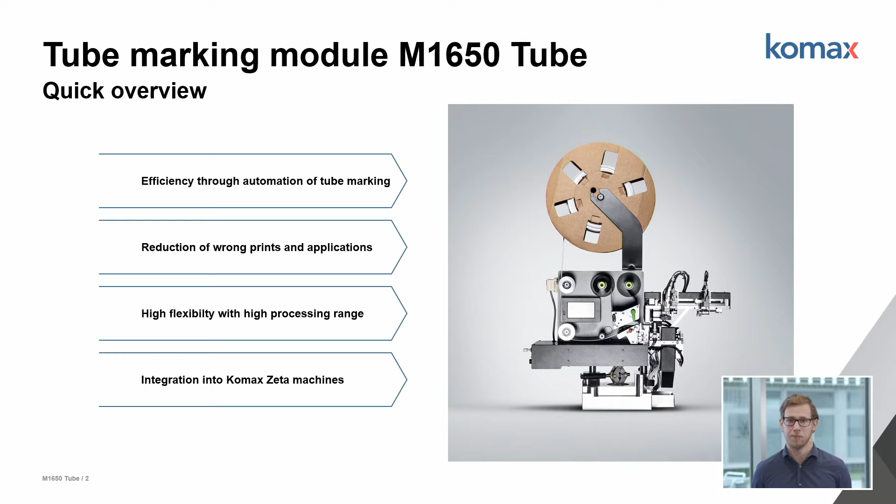I will get into the general topic of printed tube application up next. Along with efficiency, we also see the importance of error prevention, which can be increased with automation in general and also with this new module. Finally, it is important that we keep a good amount of flexibility nonetheless for different applications with the same module, despite the high degree of automation we see.

During the webinar, we'll also gain some insights into how the module performs in a production environment. Therefore, we visited our customer BBC Bircher Automation, where the module is already being used.

So let me first introduce you to the general topic of wire marking with printed tubes. What is tube marking, and where is this type of marking used as an alternative to other proven marking systems like inkjet marking or laser marking?

This marking system is a proven standard in control cabinet construction, as well as in the railway industry and other industries. In addition to printed tubes, there are also similar marking systems being used, like special wire clips or printed labels which are wrapped around the wire. But these are not in focus in today's webinar.

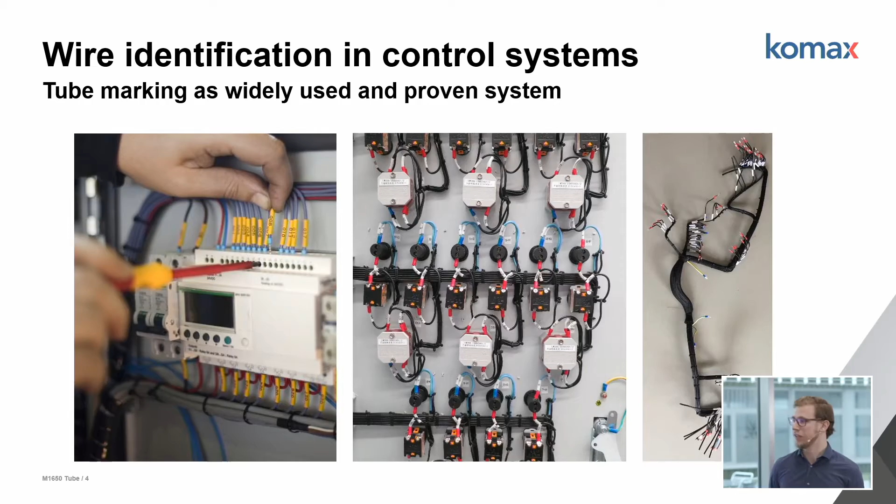These markings include information like terminal designation for the wiring, and one great advantage of this marking system is that these labels can be replaced later, for example, when components have to be replaced in the field.

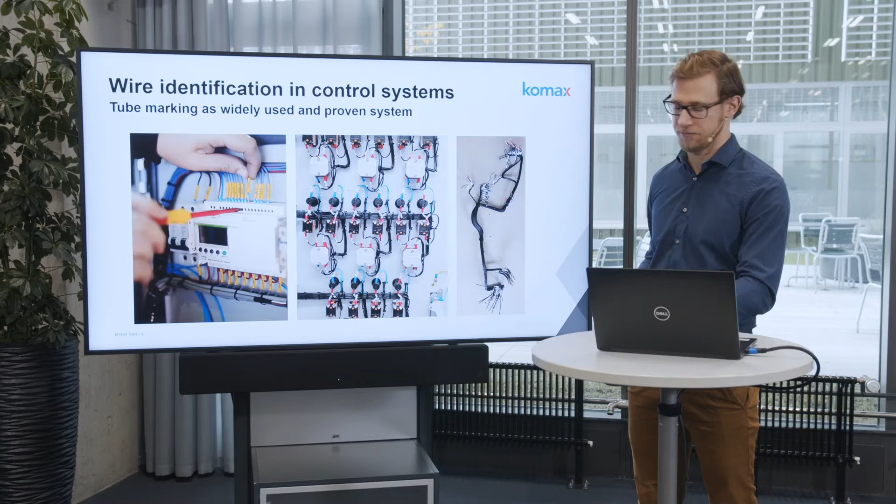Now let's talk about the reasons why this marking system is widely used in the industry and highlight some of the advantages of tube marking over other marking systems.

As I already mentioned, the printed tube can be turned and moved on the wire. On one hand, this allows the right placement of the marking on the wires so that the information, the imprint, faces to the front. This ensures a well-arranged layout in the control cabinet, and so it looks just better overall.

On the other hand, the wire can be cut to length during the wiring without losing the marking on the wire. For example, with inkjet or laser marking, where the marking is mainly on the front of the wire, when it needs to be cut to length during wiring, the marking may get lost. That's not the case with this tube marking.

Another important advantage is the independence from the wire color. Due to the dark printing on a plain colored tube, which are mostly white or also yellow, a high contrast is given for good legibility of the marking.

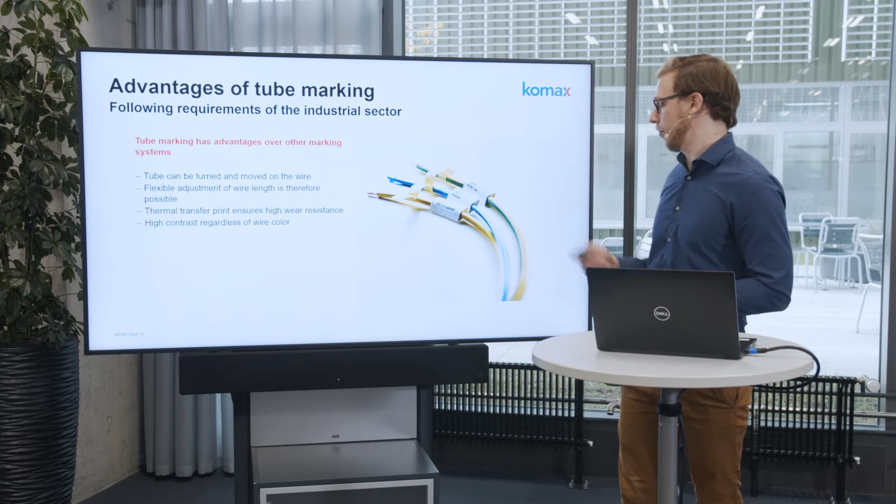Additionally, thermal transfer printing, which is also commonly used for such applications, ensures good abrasion resistance. But I will get to the topic of thermal transfer print later.

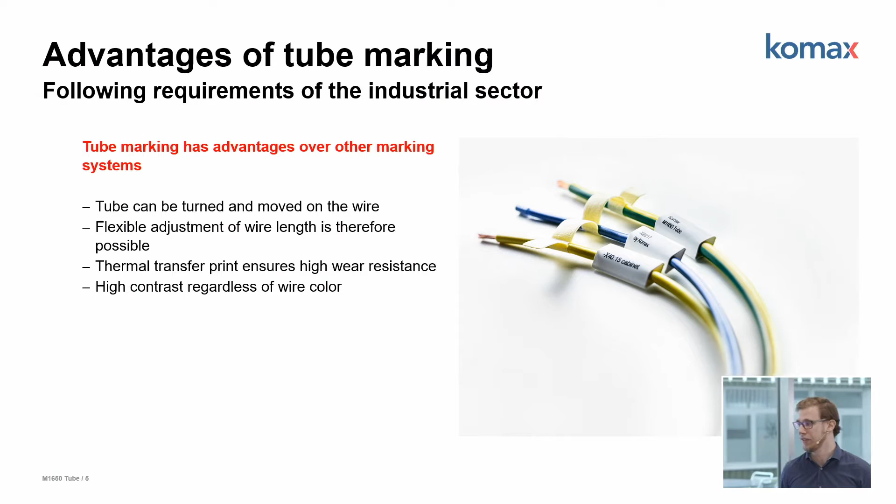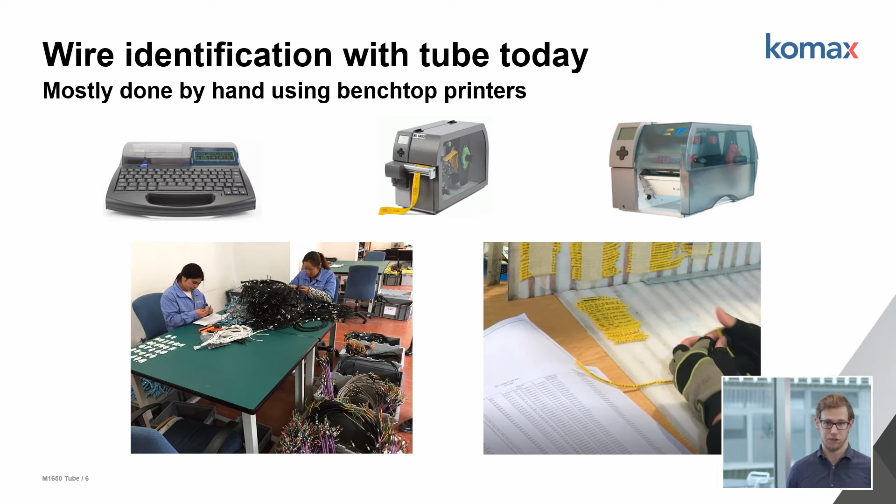These pictures give an impression of how this works today in workshops. It becomes obvious that this process has room for improvement when it comes to efficiency or error avoidance, and therefore offers considerable cost-saving potential.

That is where Komax comes into play as a long-term expert in the field of automation in the industrial sector. With the tube marking module M1650 tube, which I briefly introduced at the beginning, our engineers found a way to automate this manual process for the Komax Zeta transfer machines. Now let us learn what this means for process consistency in control cabinet building.

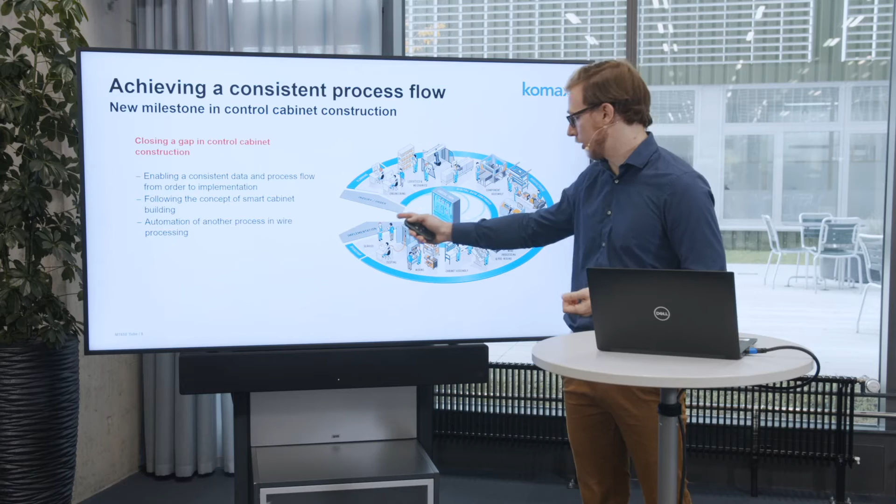The goal of automation in the industrial sector in general is to enable a consistent data and process flow from the order up until the implementation. The automation of wire processing and preparation for wiring are crucial steps in this process chain. It's located here in this picture.

With the new tube marking module, the M1650 tube, we close another process gap for wire processing and therefore reach a process consistency which has never existed before. Might sound like a small piece in the whole picture, but nevertheless, for applications which use printed tubes as wire marking, this will bring a 3 to 4 minute process down to around 1 minute when it comes to wire processing.

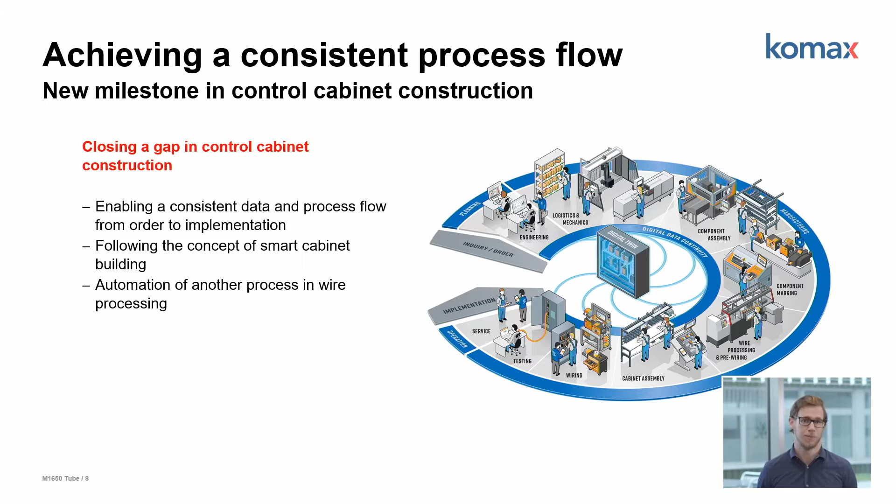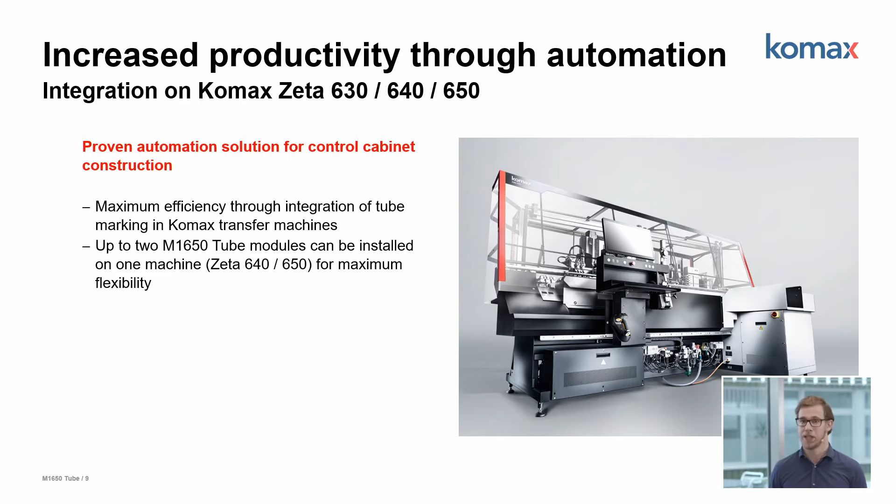The Komax Zeta line consists of established transfer machines which are already widely used for high efficiency process automation in the industry. These machines play an important role in the concept of smart cabinet building we have just seen, and also in the automation of this whole process chain.

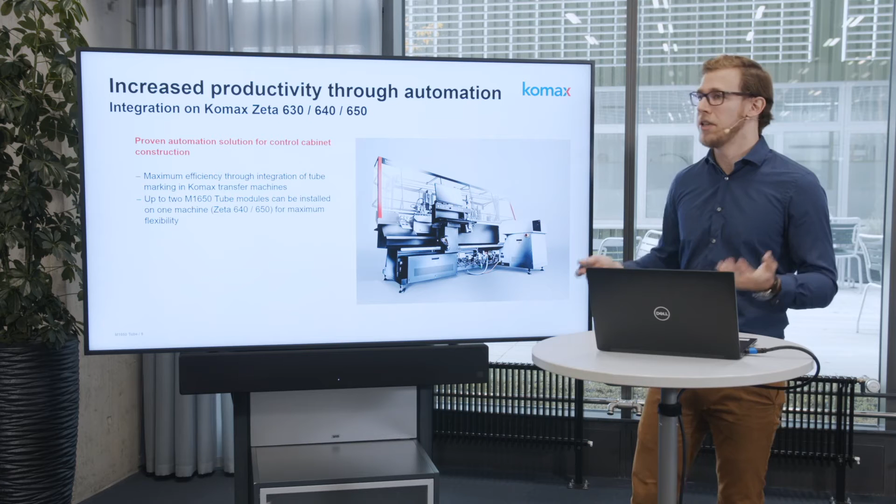The M1650 tube can be integrated into Zeta 630, 640 and 650. It's even possible, for maximum flexibility, to install up to 2 M1650 tube modules on the larger machines, the 640 and 650. This may be advantageous if different tube types are needed in one set of wires.

We've talked a lot about the concept of tube marking and process automation in control cabinet construction. Let's now experience how this works in practice. In the next few minutes, I will explain the functionality of the new tube marking module from Komax. But before diving too deep into the details, and because a picture is worth 1,000 words, let us see the functionality of the module in a short video.

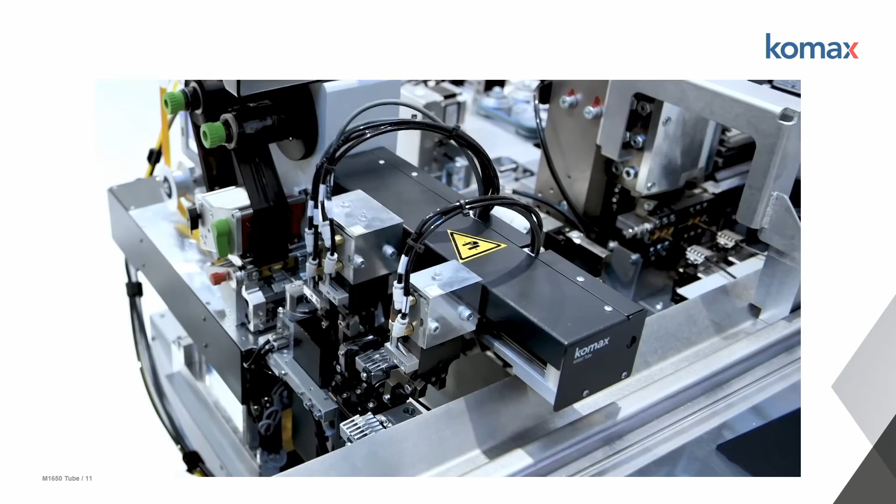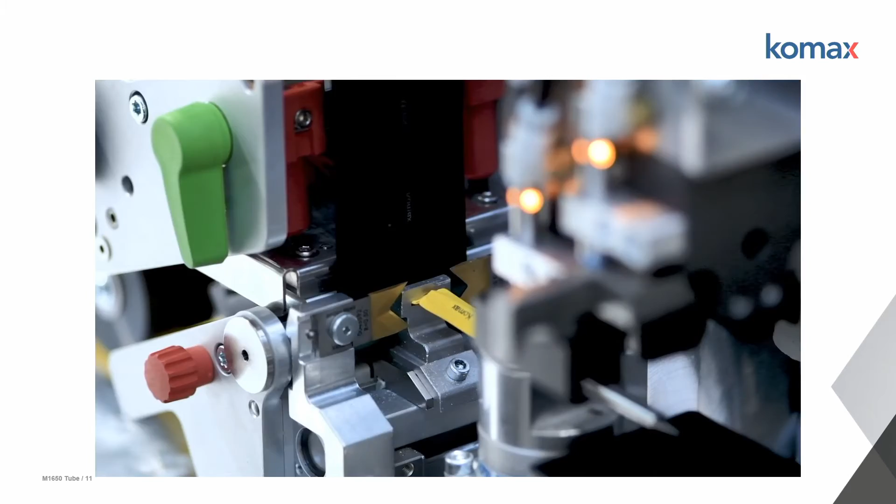Here you can see the printing head and the cutting unit. The tube is fed from a reel, printed on, and then prepared for the application of the wire. Thanks to the rotational unit we see here, a tube can be applied to the wire while the next tube is already being prepared in sequence. The application of the tube on the wire is done by a sophisticated gripper system which is laid out to process different forms of tubes.

The core of the module is the printing unit we can see here. This printing unit is a widely used standard in the industry, and it's been adapted to our needs.

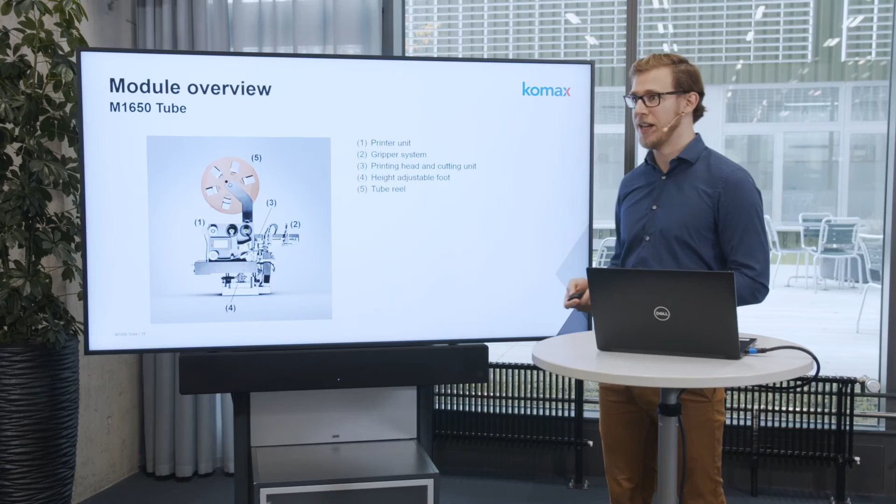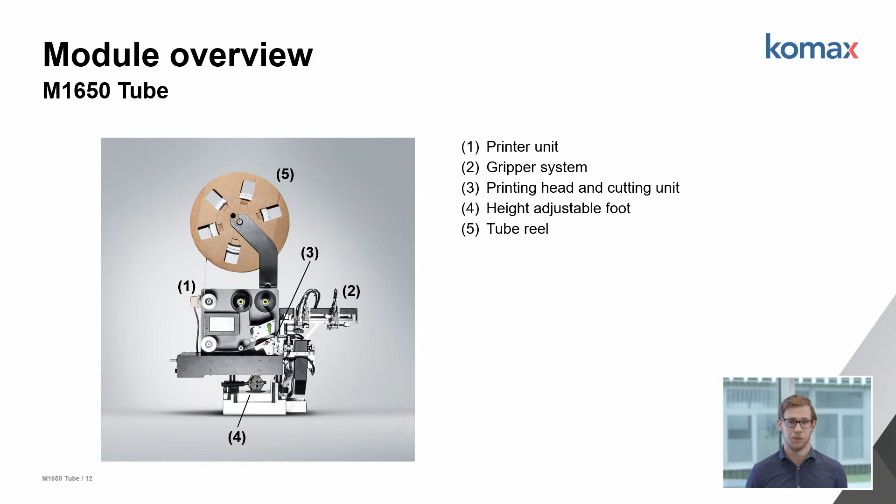The tube is directly fed into the printing unit from the reel back here, and printed on using a thermotransfer ribbon. The cutting unit cuts the tube to length and conveys it to the gripper system we see here, which prepares the tube for the application on the wire. The module is also equipped with a height adjustable foot we see here, for precise installation on the SETA transfer machines.

I already mentioned that we need to keep a high flexibility despite the fact that we have a high degree of automation on the SETA machines. The M1650 tube can sequentially produce the tubes. This means that the tube length as well as the printed information can vary from one wire end to the next, and on the other hand, different tube types and tube forms can be processed.

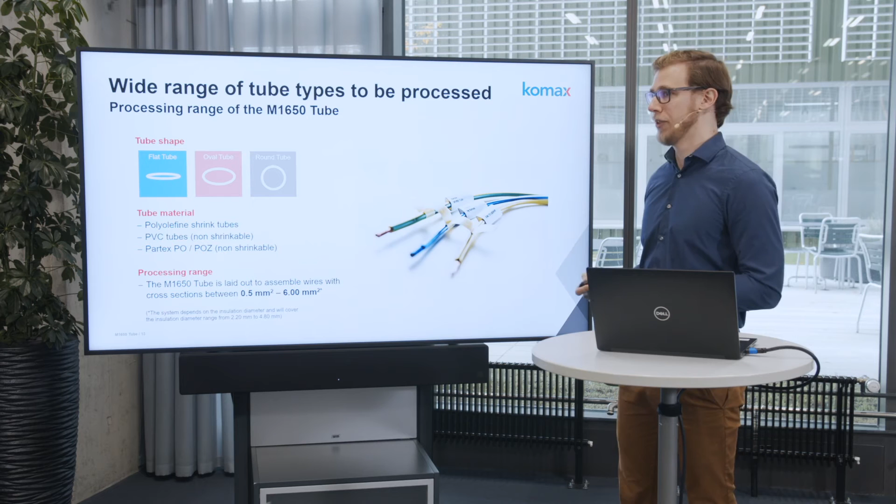So you see here, the gripper system allows the processing of different tube shapes. We can process flat, oval, and round tubes on the M1650 tube. This is the basic form as it comes from the reel. If needed, there are application sets for each tube type, which can be interchanged on site and in a very short time.

Looking at the processing range, we cover a wire cross section range from 0.5 to 6 square millimeters. The crucial parameter here, however, is the outer diameter of the wire. There we have a range from 2.2 to 4.8 millimeters.

I already talked about the thermotransfer printing system, which is used in the M1650 tube module. This printing system is proven and widely used in the industry, and this has, of course, many advantages. Thermotransfer printing itself has advantages like high abrasion resistance and high legibility, as I already mentioned, because we print on white or yellow tubes.

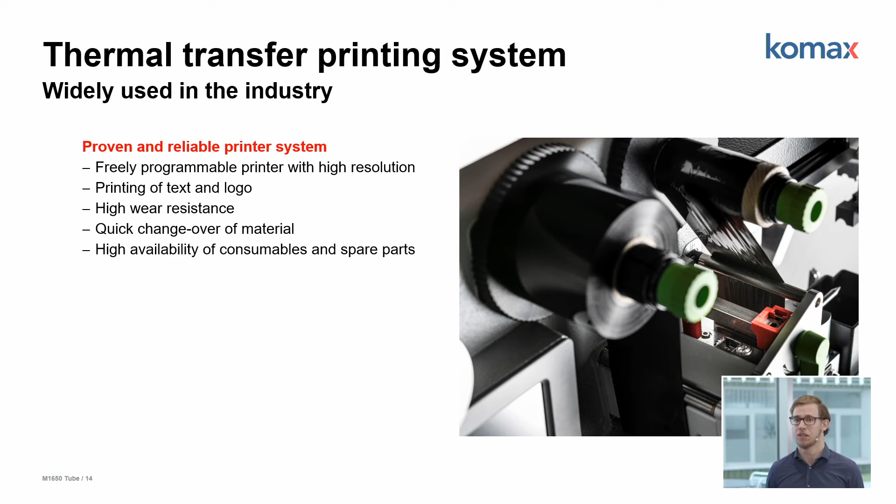But there are additional advantages to highlight for the daily use of the module. If the thermotransfer ribbon comes to an end during production, it can be easily changed in a very short time, thanks to an accessible quick locking system. Due to the fact that the printing system is widely used in the industry, spare and wear parts are also widely available.

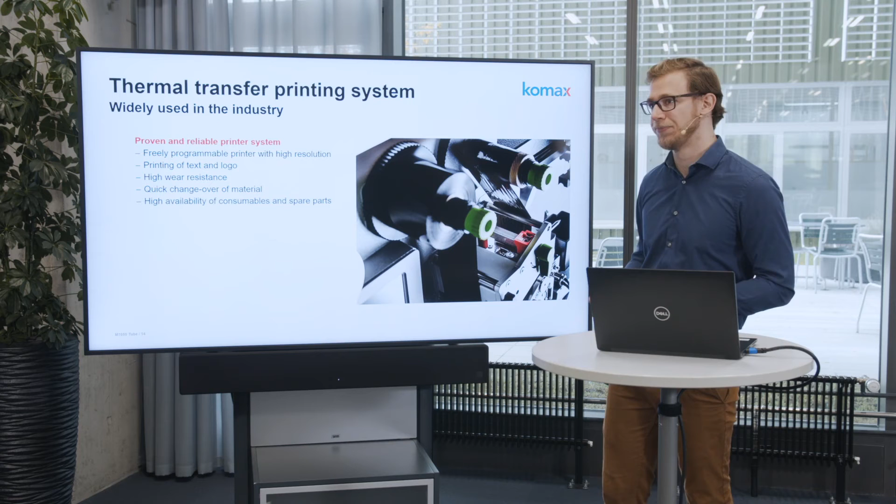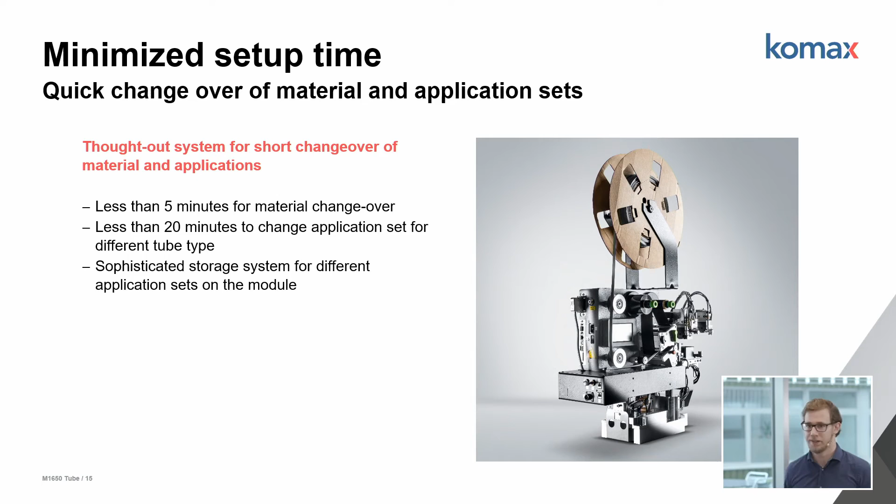As you see, the module is designed for an extensive and user-friendly use in production. The change of the consumables, in other words, change of the tube reel and also the thermotransfer ribbon, is a matter of less than 5 minutes. It takes even less time for more experienced operators.

A change of the application set for different tube types—so if another tube type has to be processed on the same module—can be done on site by the operator. Therefore, the thorns of the rotation unit we saw and the gripper jaws are changed to be ready for the next application in less than 20 minutes.

We also have a storage system for different application sets on the module, so you don't lose any parts.

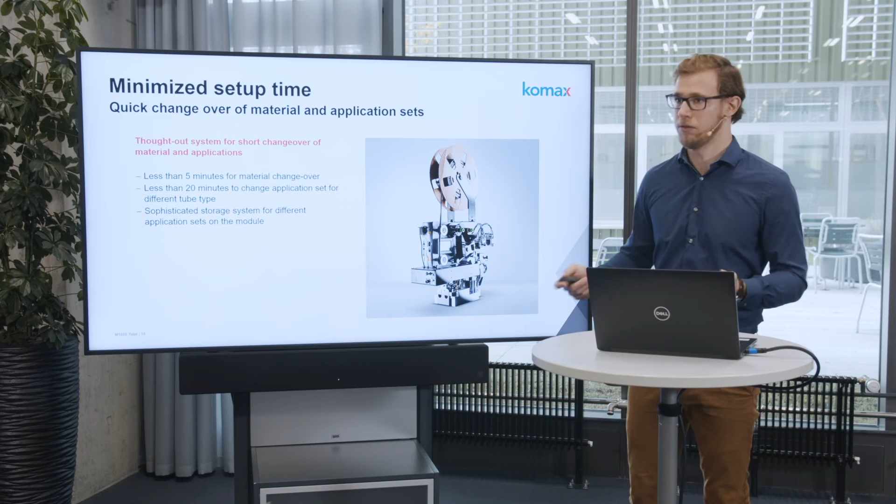Let's now experience how the module performs in a production environment. For this purpose, we could gain insight into the production of our customer, BBC Bircher Automation, who already uses the M1650 tube in their production.

BBC Bircher Automation, as part of the BBC Group, has 160 employees at the production sites in Switzerland as well as in the Czech Republic. They specialize in consulting, engineering, control cabinet construction, also installation. So BBC Bircher Automation is therefore an ideal testimonial for our tube marking module, because the wire marking process with the tubes used to be done manually in the past at BBC Bircher Automation.

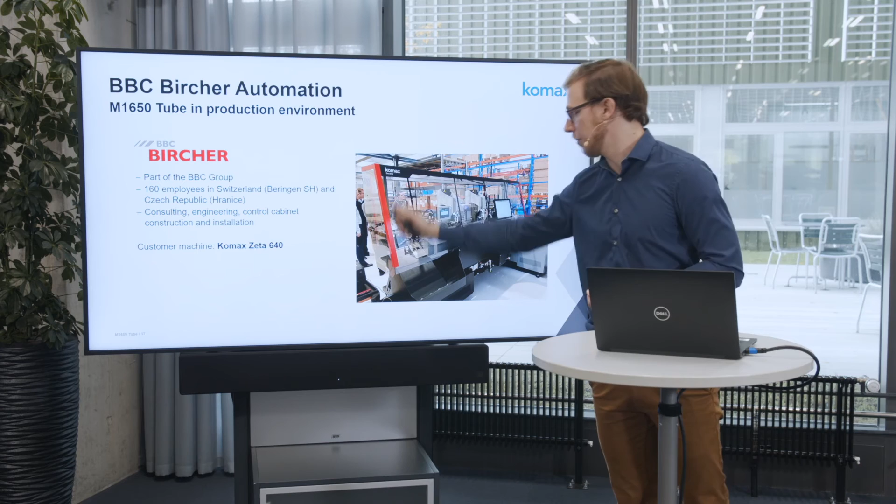The module, the M1650 tube, is installed on a Komax Zeta 640, which we can see here. That's the actual machine which is in production at BBC Bircher Automation. Additional process modules installed on the machine next to the M1650 tubes are ferrule crimping, a crimping module for other terminals, as well as a bundle unit.

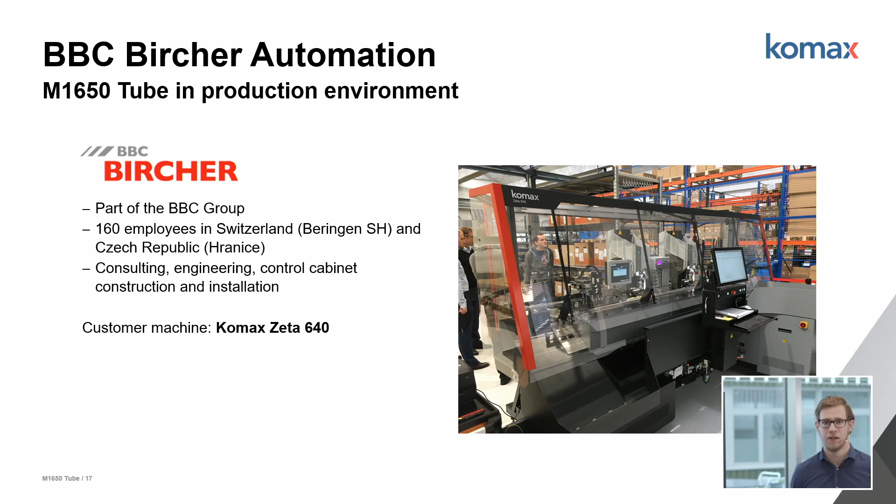Let us now watch the testimonial input from BBC Bircher Automation.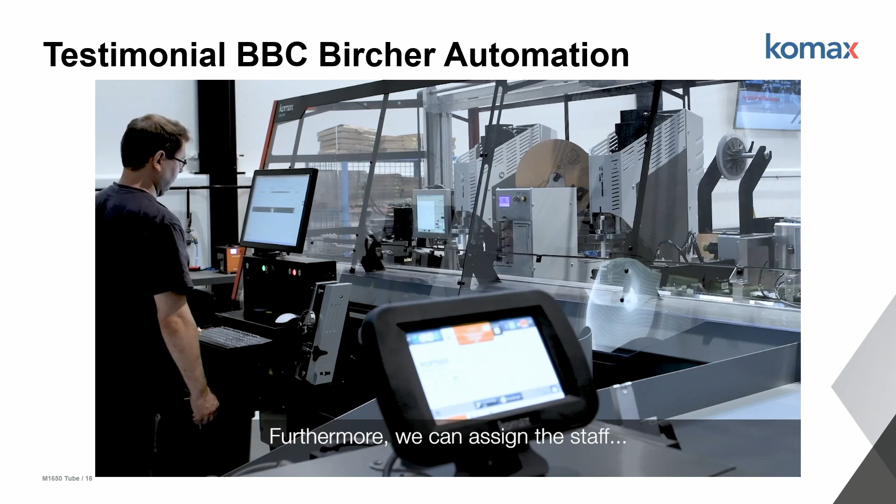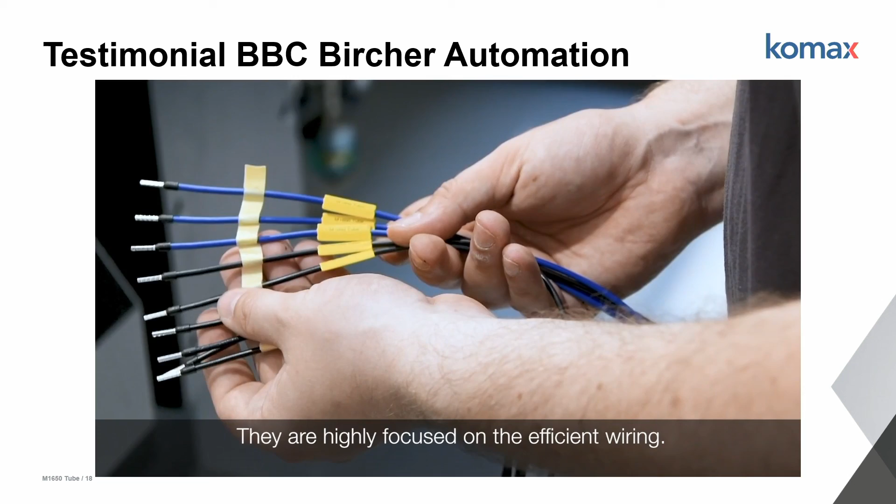I think that's an interesting point he mentioned at the end—that employees who used to do manual work of tube printing with the benchtop printers, as well as the cutting of the tubes and the preparation for the wiring, can now be assigned to more important tasks like, of course, the wiring.

So now I hope you gained some interesting insights into the world of tube marking and the solutions Komax has to offer for this process, and also how the new module, the M1650 Tube, performs in a production environment. If there are additional questions regarding this topic, feel free to contact me either through the chat function or later on my email.